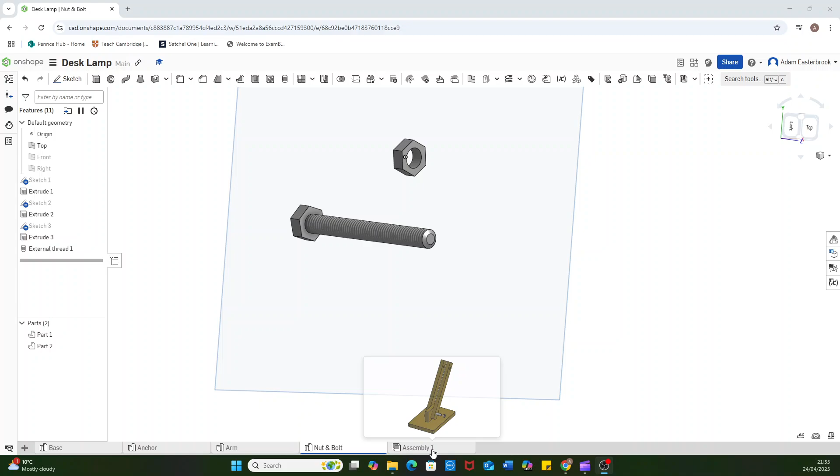So we need to assemble all the parts, all the components, put it all together, just like we would do in a workshop. We've made all the little parts, we now know to build it, put them all together, and that's what we're going to do in our assembly tab.

Click on your assembly tab, click on the insert button, and you are going to start with the base. I'm going to double click on the base. The reason I double click on the base is because it sets it. Let me do that again. Insert base.

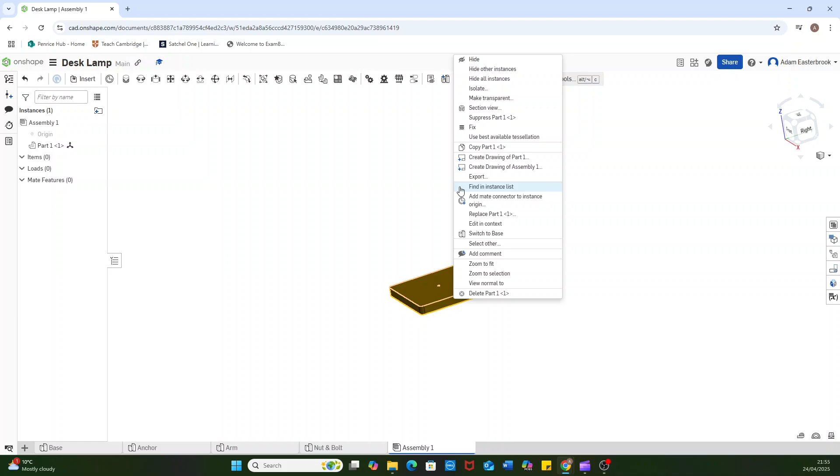I'm going to click once and then green tick. The reason I do that is it fixes it to the origin for you, and that's quite nice because you can then set things up around there. The next thing I'm going to do, I'm going to right click on that base and I'm actually going to fix it in place so that base can't move until we tell it to. So I've got that set up.

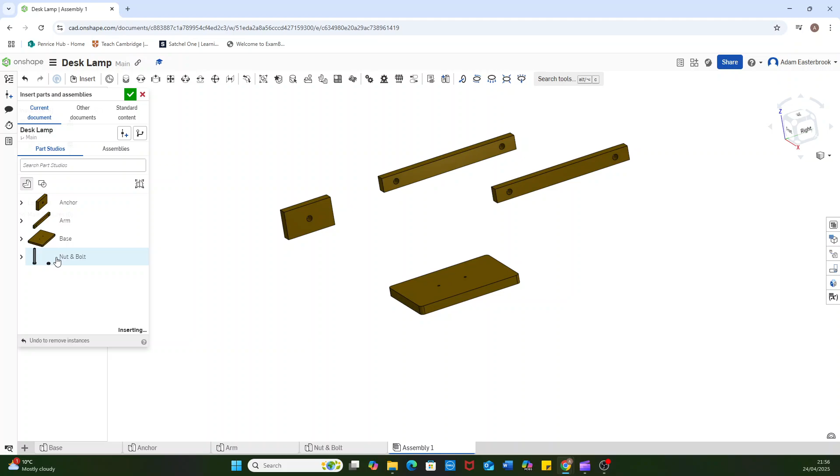Now I'm going to bring in the other parts. I don't mind where these go for the time being. So there's that anchor, I called it, and I'm going to bring in one for the time being, two arms, and I'm going to bring over my nut and bolt, green tick. Okay, so there's all my parts.

So now what I need to do is use these tools at the top here. These are our mating tools. So these are how we get the components to come together and work together. They mate one another.

So I'm going to start with this anchor, and I want to fix this down to our base. I'm going to use my fasten mate for this because it doesn't need to move. It's a bit like glue, we're just going to stick it there. So look at my fasten mate.

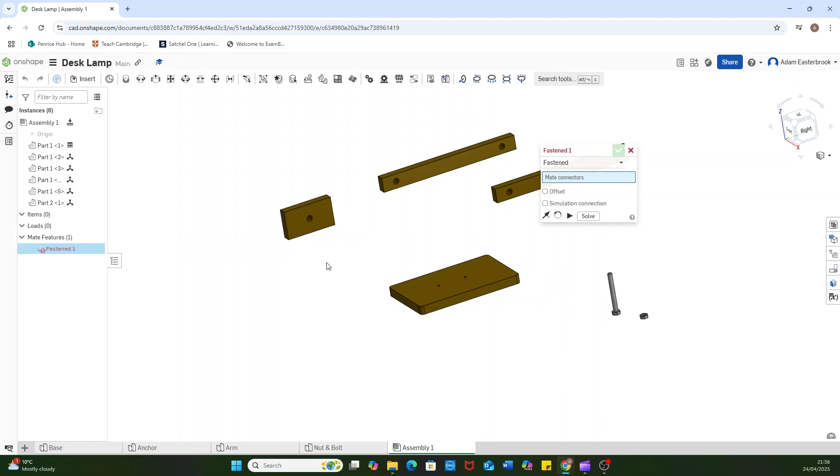I find that mating tools in Onshape can be a little bit fiddly. It takes perseverance, it can be frustrating, you're just going to stick with it. What will help you is if you start to really zoom in on the parts that you're working with and use the right button on your mouse, click and hold it, to really start to move your viewing around.

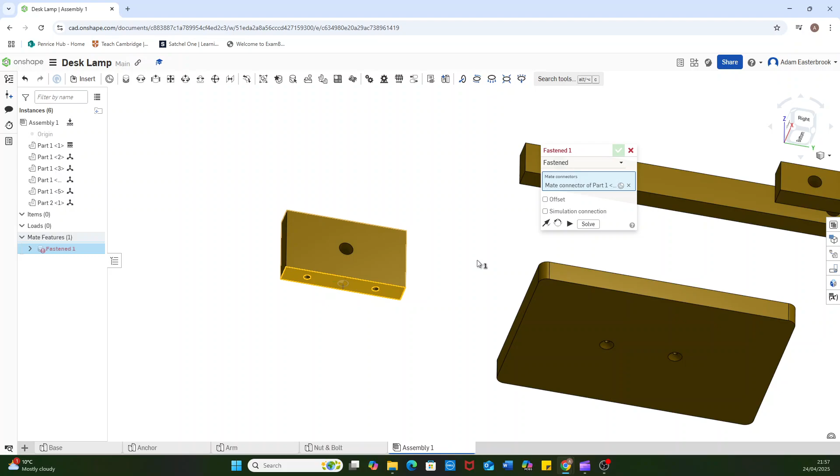So I want to get right on the bottom of this, in the center, and that blue line is key. That blue line wants to be pointing directly away from where I'm fixing it to. So I'm going to click my mating tool, my fasten mate there, and I want it again. You can see the blue arrow needs to be pointing away from the material. Bang, solve, green tick. There we go.

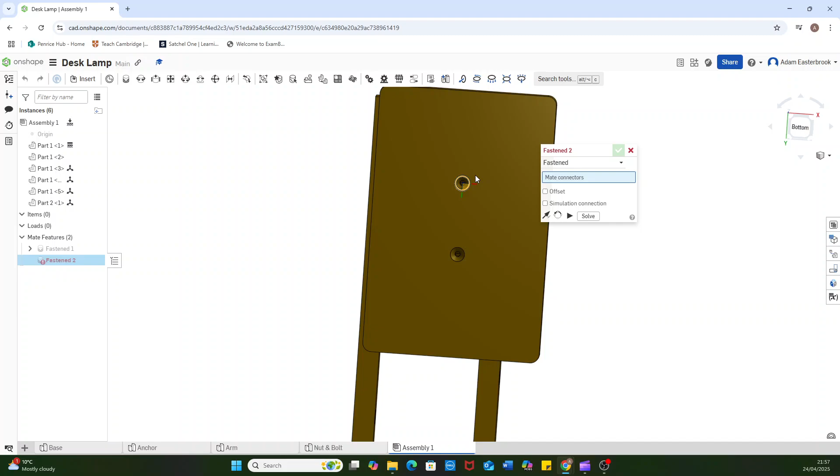So that's in place. Now if we've done this right, if I actually revolve around, yeah, you can see those little pilot holes that we've drilled into the anchor actually correspond with the through holes that we've drilled on the base and countersunk. So that's that bit done. I'm happy with that. Let's go and put the arms on.

So for this one we're going to use a cylindrical mate. We're not going to use a fasten mate because we do need it to rotate. So cylindrical mate. Let's get this out of the way so you can see exactly what's going on.

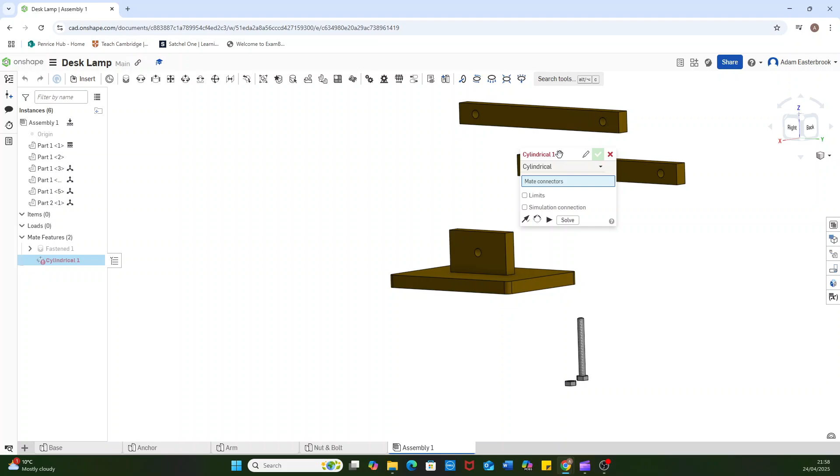So I want my blue line on the edge. Sometimes you can move it into the centre, I don't want it in the centre, I want it on the edge here. Blue line pointing away from the material. Green tick. And I'm going to put that one.

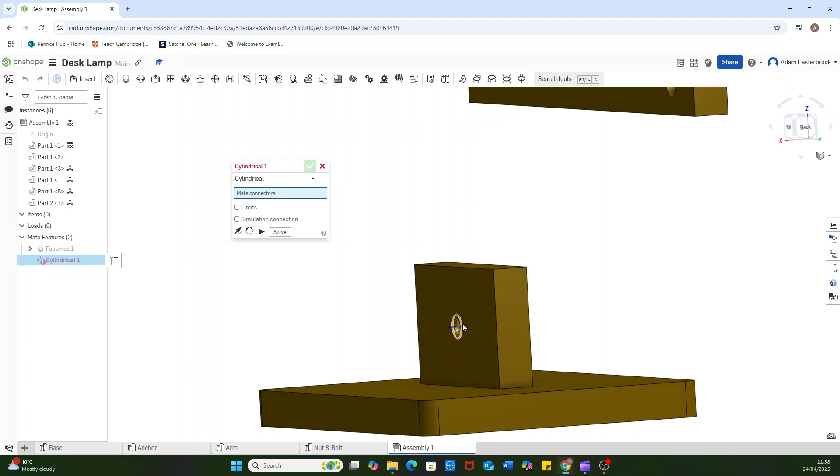I've got it perfect there. Again, blue line's pointing away. I want it on the edge of the circle here. And let's get that one over. There we go. Solve, green tick.

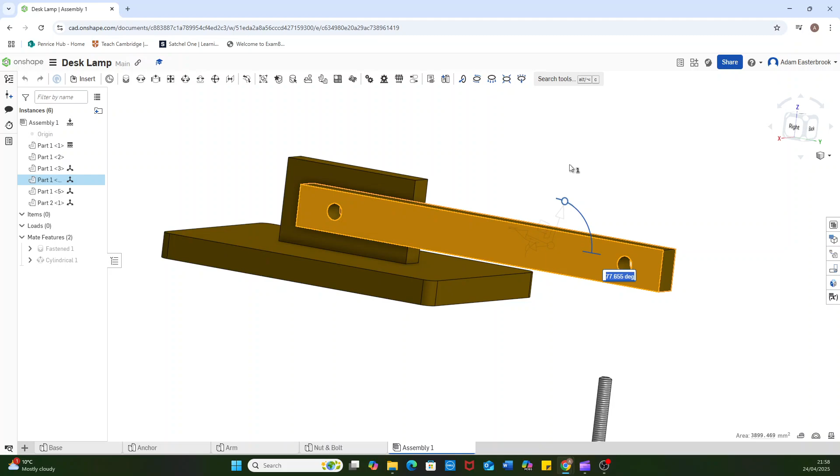So the reason we use cylindrical mate for this one is if I now left click on the item, I can swing that arm around and it's fixed around that hole. So that's how the arm is going to move in real life.

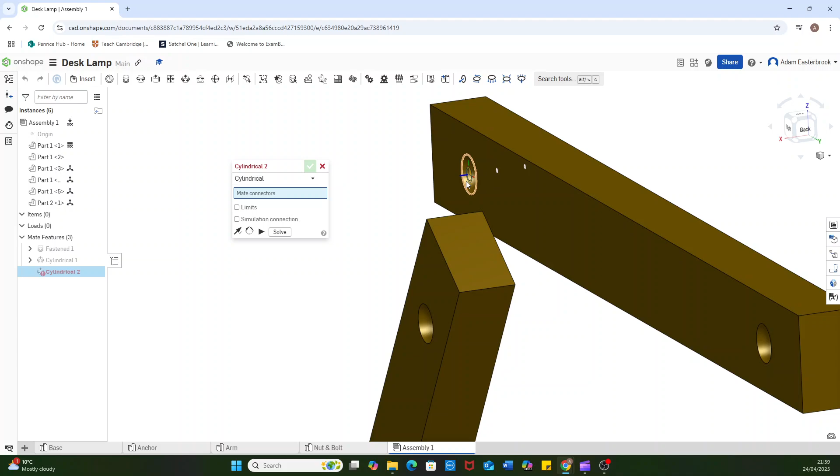So we need to do exactly the same with the second arm. So cylindrical mate. In we go, zoom in. Blue line pointing away from the material, edge of the circle. Come out, down onto here, blue line pointing away, edge of the circle, solve, tick.

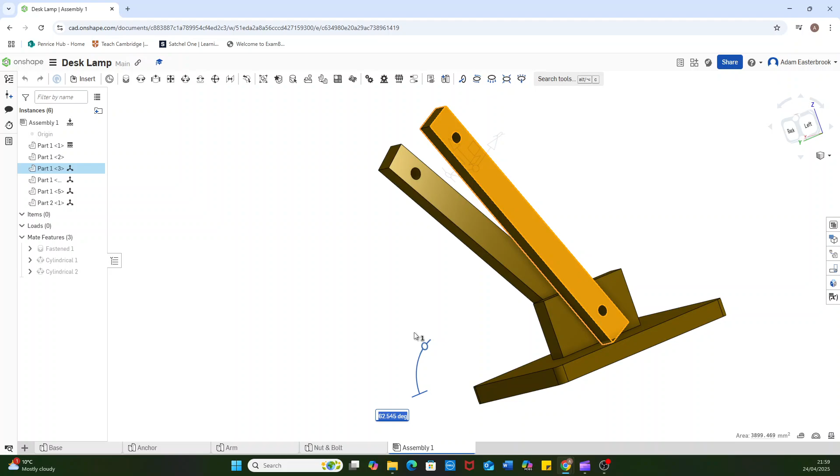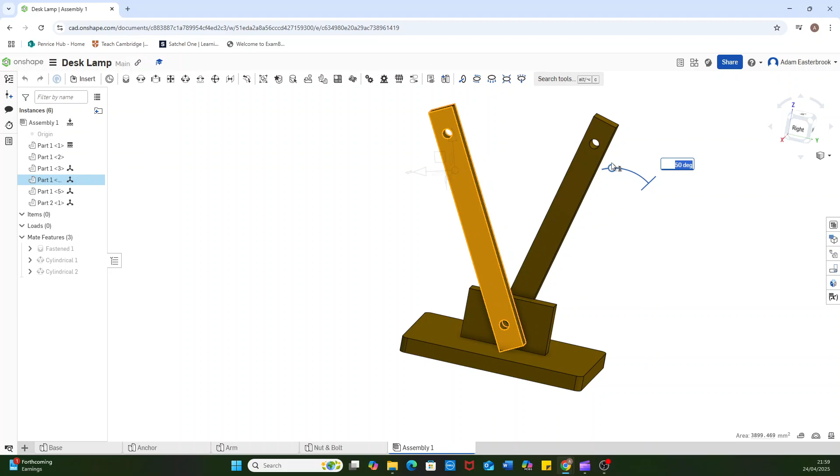And again, using this tool here, I can now orientate them. So I can set the angle. Let's say I want it to be 50 degrees. I can click enter. I can do exactly the same for this one here. There we go. So they're all lined up nicely.

Next, we want our nut and our bolt to go in the bottom here. So let's do our bolt first. I'm going to use a cylindrical mate. Do I want to use Revolute mate? No, we'll go with cylindrical mate.

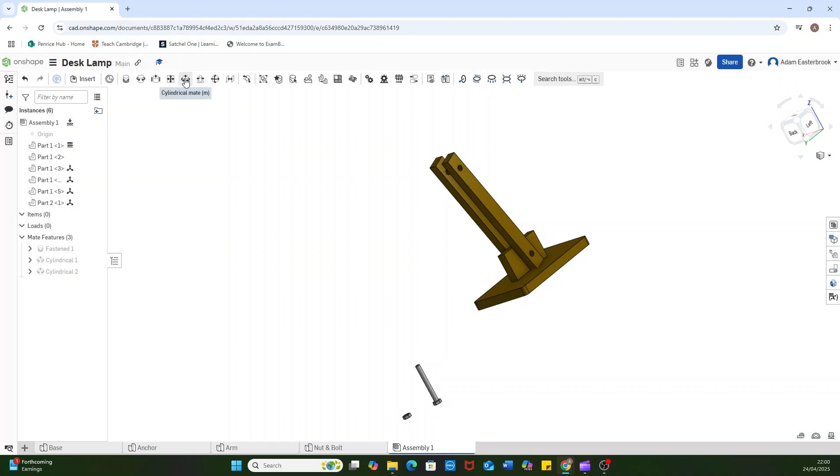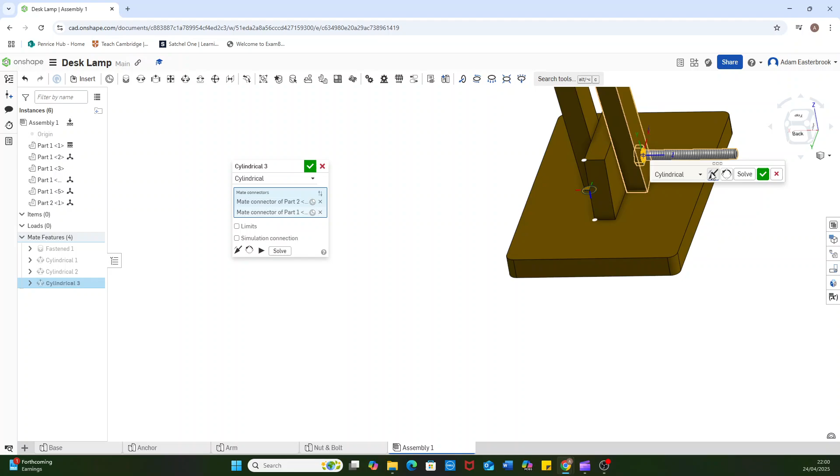So I've chosen the base of the head, blue line pointing away, and I want that to be... so I can flip it around. There we go. Solve. So there's the bolt in there.

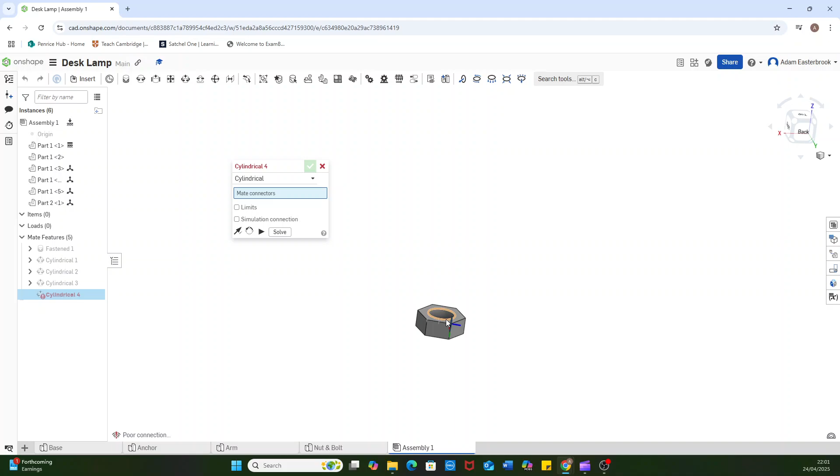All I need to do now is mate the nut on the end here. Again, I'm going to use a cylindrical mate. There are some fancy things you can do with nuts and bolts, we're not going to do it today. We might do it later on, where you can actually animate it so the nut screws along the bolt. If we have time, or if some people have finished, that's something I'll get you to do. So I'm going to click on.

Remember, it's fiddly. It usually allows you 3 places in which to set your mate from. You can see there with the little white dots. If I move my mouse back over here, white dots. Come on, there you go. So I've got one there, one in the middle, one at the bottom. Okay, so I'm going to choose this top one, and the blue line is pointing away from the material.

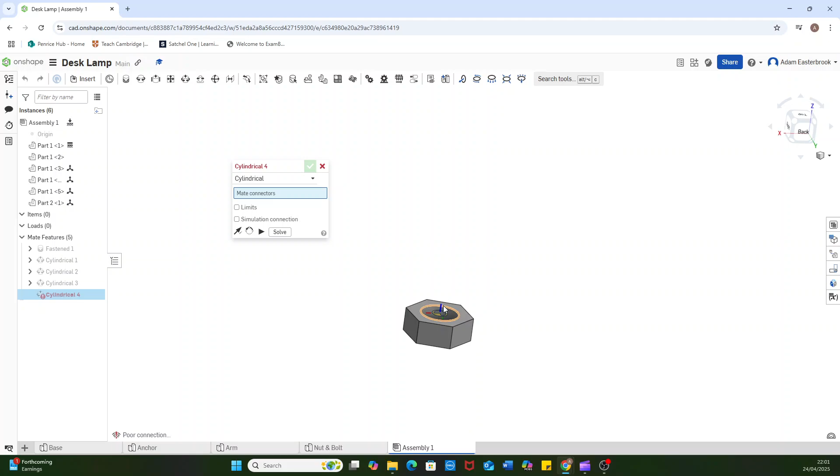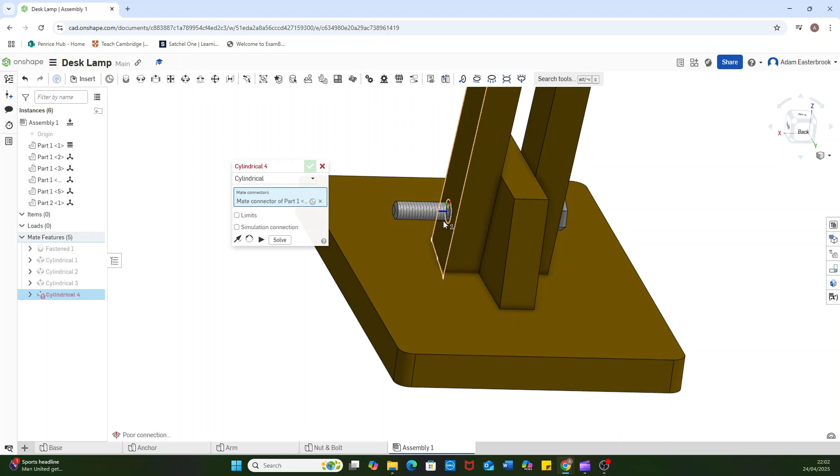It's fiddly, persevere. That one there is then going to go, and it's going to sit on my bolt. Come on. Oh, again, fiddly, fiddly, fiddly. I keep getting it. Oh, there we go. Now it's not quite where I want it to be. Now what you can do is... I won't let me do it, this one. I'm going to have to redo that.

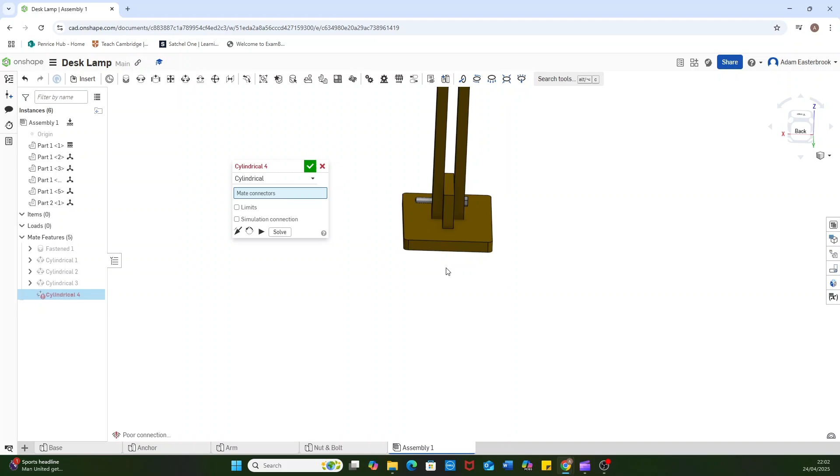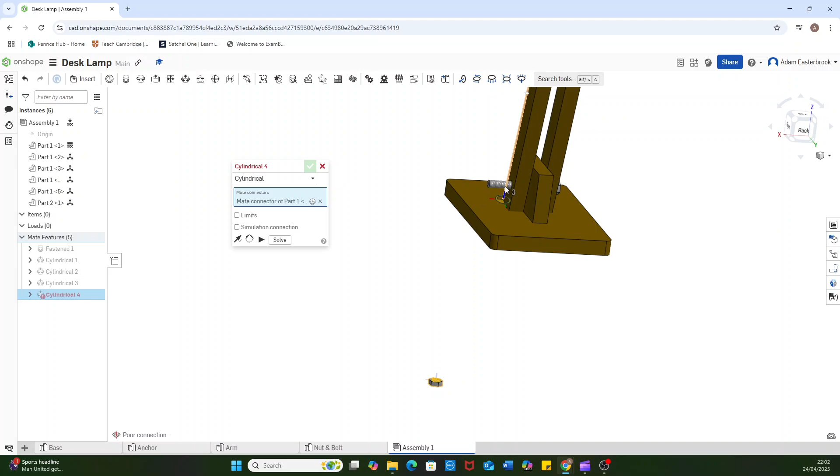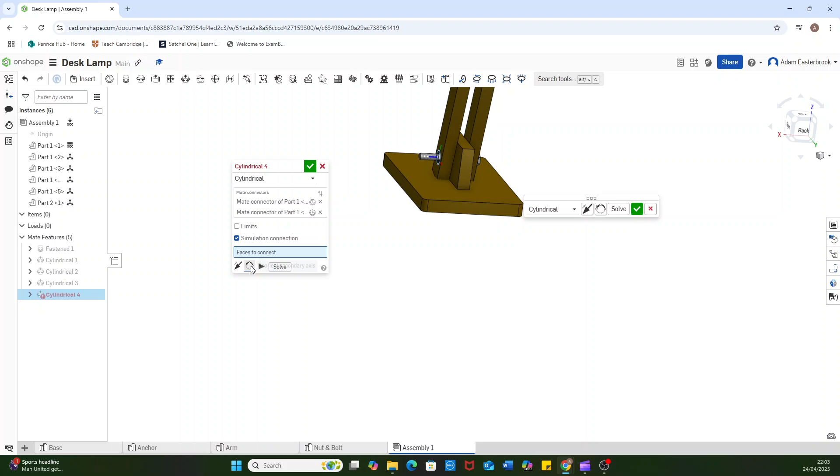It's not working, is it? Yeah, okay, let's try that one more time. I'm going to use a Revolute mate. Let's try that one instead. Let's try this side of the bolt, see what happens.

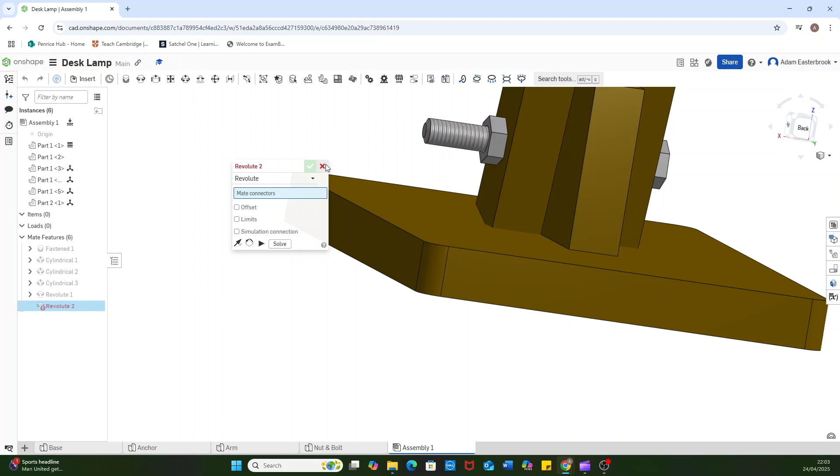That's better. So, green tick. So there you go. You can start to see now how we are assembling our desk lamp. I haven't finished, it's not finished.

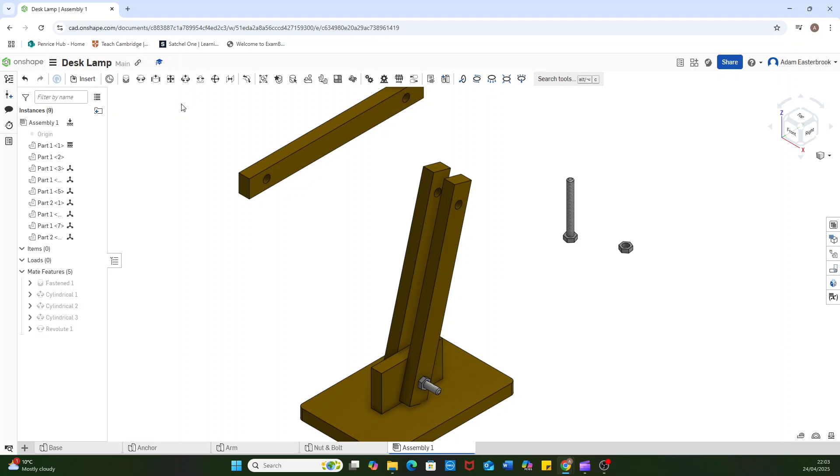So I would then need to come to insert. I need to insert another arm. I need to insert another nut and bolt. And you can see I will start to mate these two together. Let me start that process, and then I'll hand it over to you guys to finish it off.

So let's use our cylindrical mate. Let's move this out of the way. Blue line pointing away from the material, edge of the circle. That edge has got to line up with this edge. So we're in there.

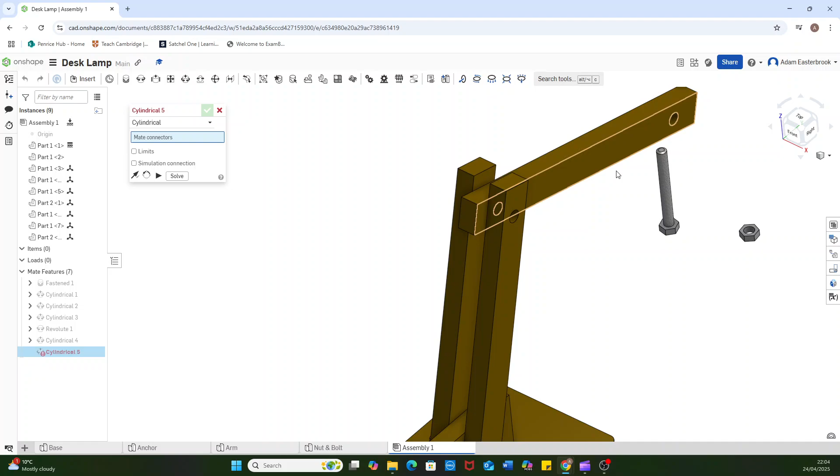And again, just to show you, I can click on the arm, and using this one here, I can change that angle, which is what we'll be able to do with the physical product that we produce.

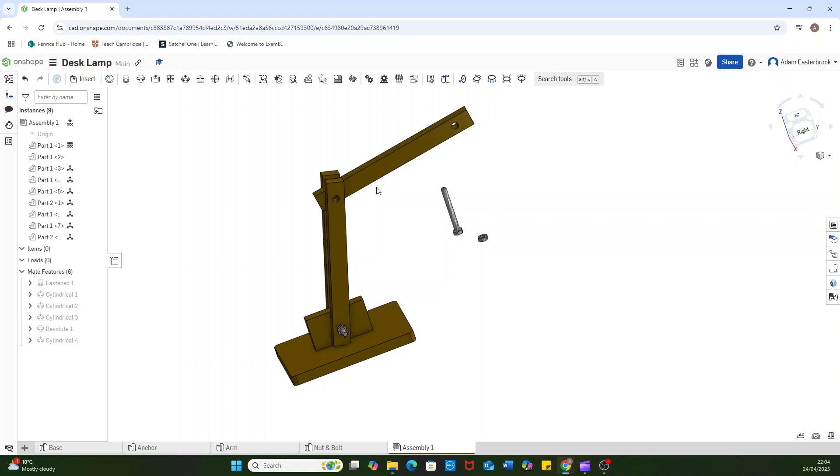And then we can put the bolt through here. So I'm going to use cylindrical mate. I'm going to choose the base of the head. That's going to go on there. I'm going to flip it round.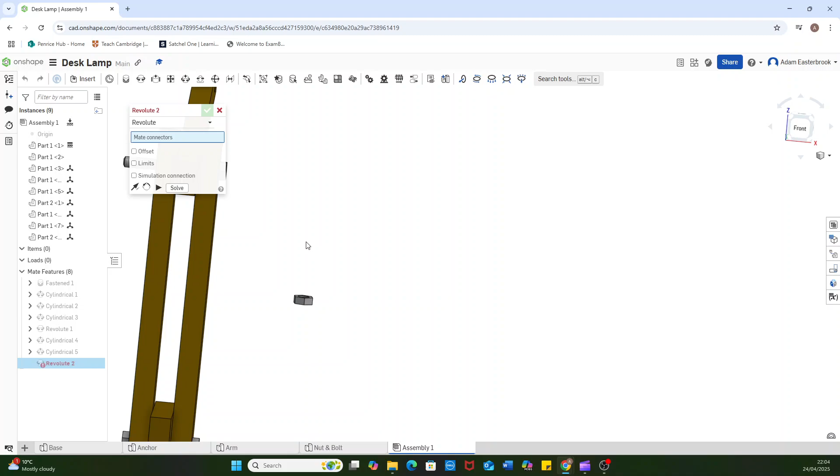Solve, green tick. And then we're going to use, like I used before, Revolute mate for the nut, and I chose the bottom of it. So that side of the bolt, and that's going to mate with this part. Come on, blue line pointing away.

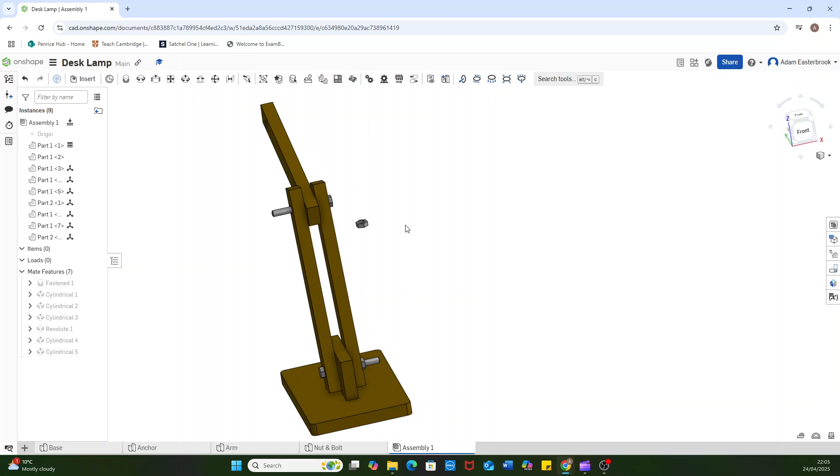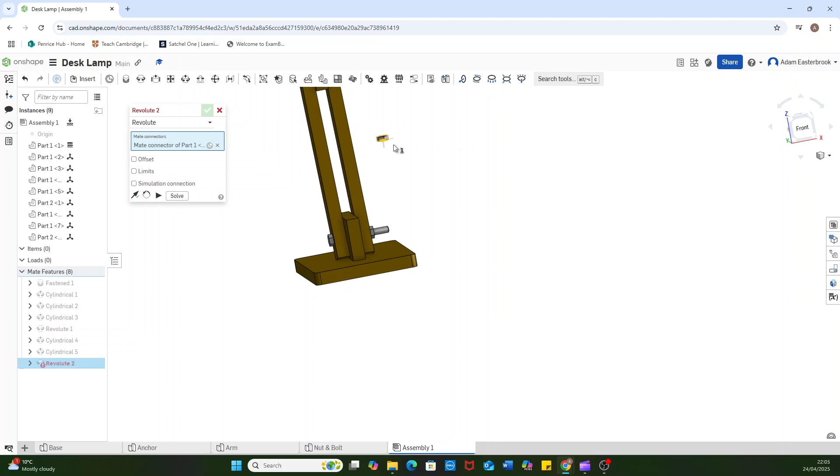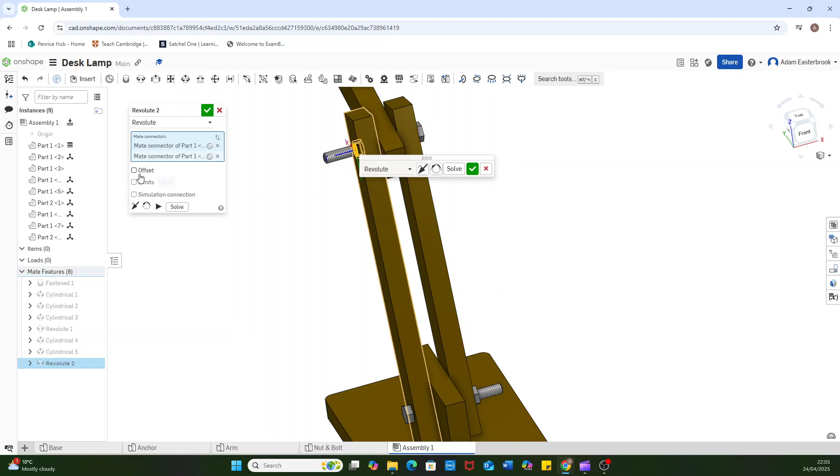Before, when I was putting this bolt in and then trying to get the nut to mate and I couldn't do it, I was looking to see this offset, but it wasn't there. This time it's there. I'm not exactly sure why it wasn't there before, but that's what I was looking for. So with this offset, what it means is you can move the piece before you say that's exactly where I want it to be.

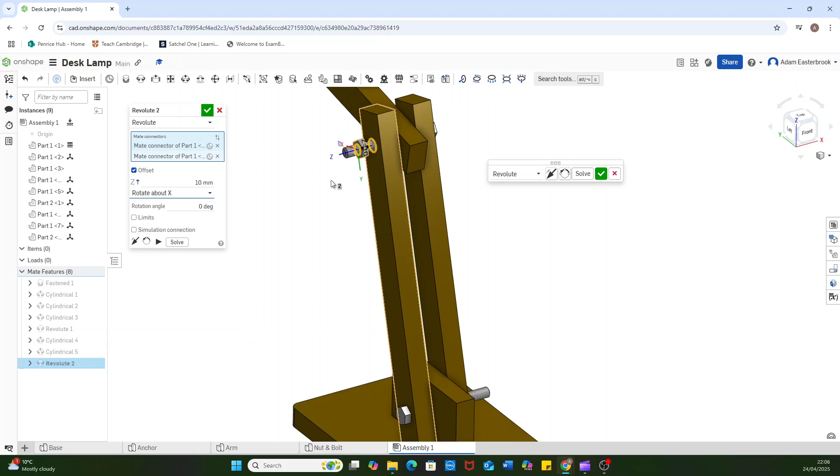So if I click the offset, now my Z-axis is the blue line, and I want it to move this way a little bit. So if I type in... this is too far, if I type in 10 millimeters, you can see it moves along that Z-axis a little bit. So I'm going to just use a bit of trial and error and set it to 5. Okay, and I'm quite happy with that. So solve, green tick.

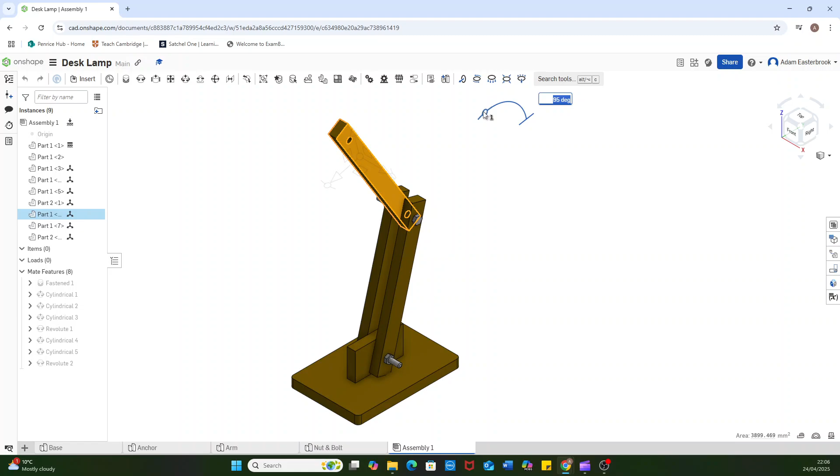Alright, so there is the second bar of my lampshade, desk lamp, all mated together. I mean, I haven't got the bolts the right way around, but that could be intentional in your design because they will stick out slightly. So this one sticks out on this side and then it goes that way. I don't know, depends if you're OCD or not. But there you go, that is that part.

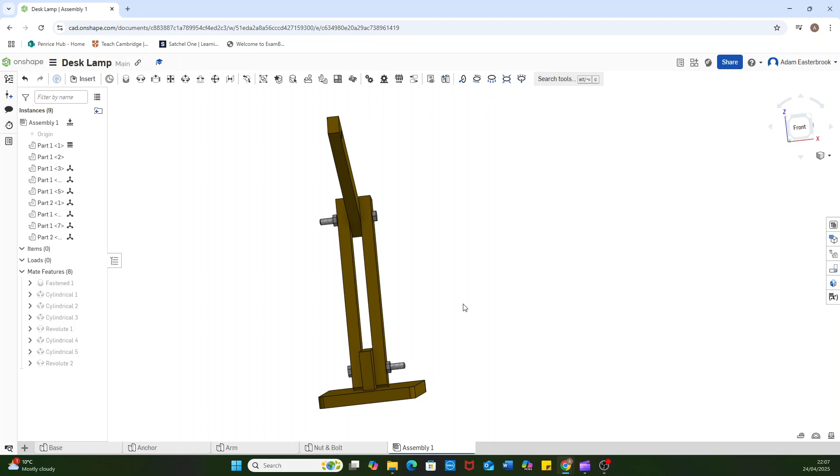When you get to that part, I will explain what you need to do. You're going to then start to actually create more of the design yourself. Think about the USB cable. We've done that before when we designed our phones. We created the charging cable. We need to create sweep paths.

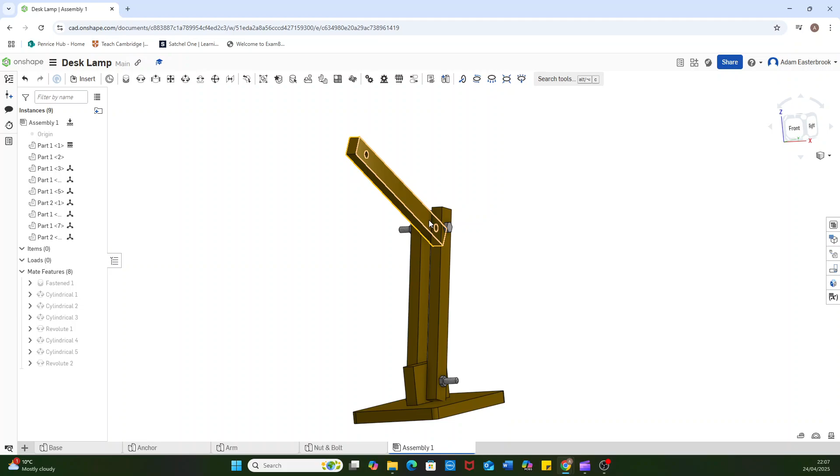We need to create circles, extrude it along the sweep path. Think about your cable management. Where are you going to put the cable? How is it going to be kept out of the way, nice and tidy? Think about creating the USB port for the cable. And importantly, you also need the strip light, so you can create a component that looks like a strip light. Lots to do, lots to get on with.

As always with Onshape, the more you do it, the easier it becomes, the quicker you get at it, and the better you become. Persevere, keep going, have some fun, and we'll leave it there for a minute. Thank you.